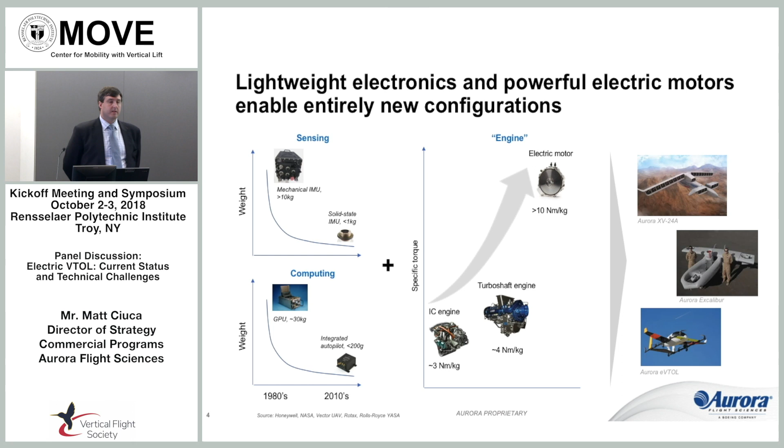Several technologies have come out over this time that were promises to simplify the operations, to bring more pilots into the fold, into the GA community, and to really improve access to on-demand air transportation. I remember quite a bit of talk in the 2005 to 2007 timeframe when the very light jets were coming out, and several years after Cirrus had entered the market, there was a lot of talk about on-demand aviation using those higher-end single-engine propeller aircraft and the very light jets, but we have not seen that happen.

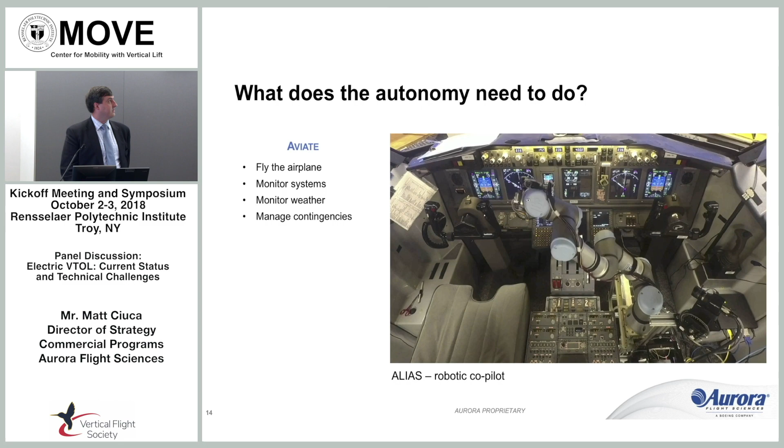So then I'll jump to the next section, which is navigate. This is an example of the perception equipment that's actually on the AACUS system - that was the first system we saw the Marine actually ordering a delivery with. What this does is come in and evaluate the area and determine where to land, where to safely land. And then today, a human operator will confirm that that's the appropriate place to land.

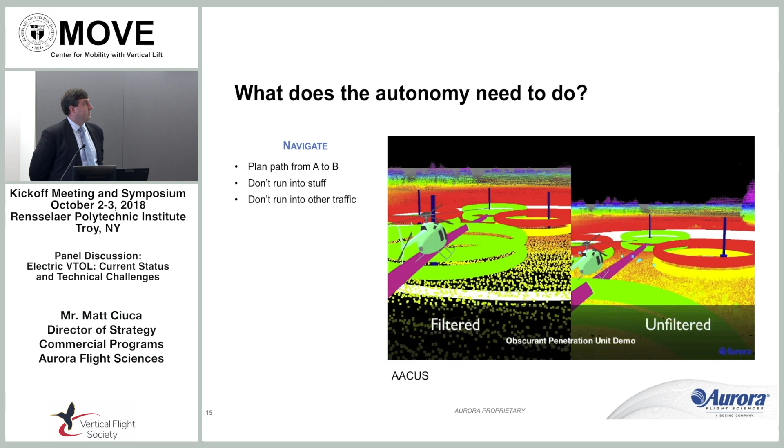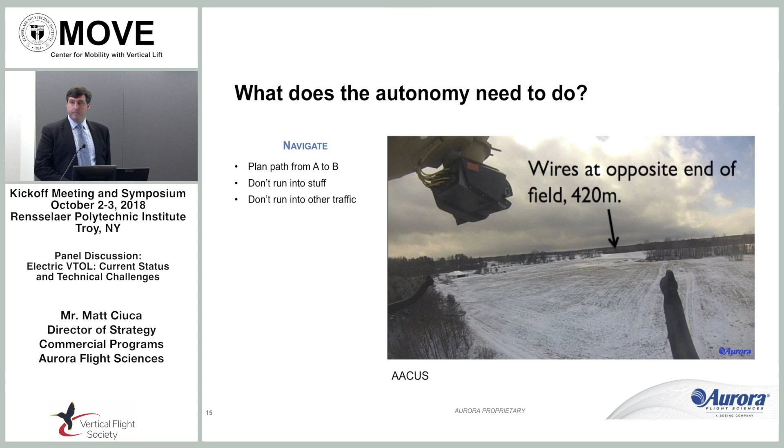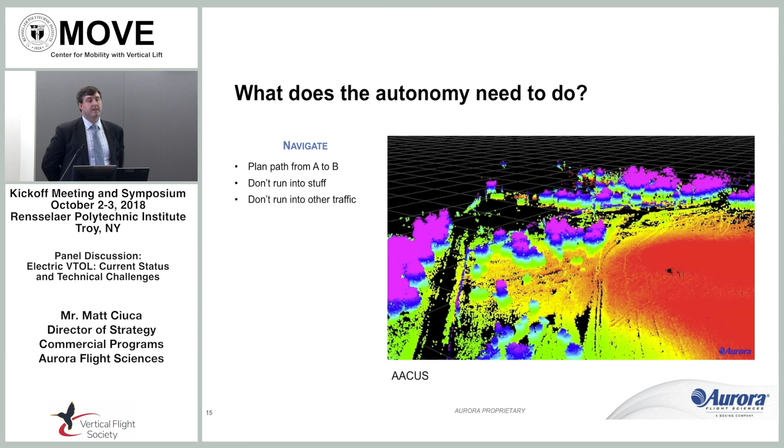So you can see that we're already looking at the sensors and the software required to do the navigating part. Now, I didn't bring a slide on the communications side of things. We basically, even when these are operating autonomously currently, we relay our communications. So we talk to ATC. ATC doesn't know that there's not a person sitting in that aircraft, the way that it's done.

And so that's really where I'm going to close out. But I appreciate you guys having us, and I look forward to the questions later.

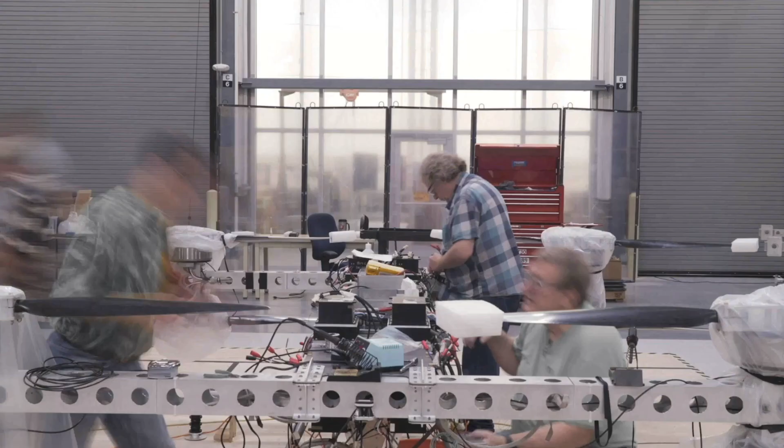So this is our latest vehicle. I'll talk more about that. And then here's some Aurora videos. So we're like this.

And just for fun, we're going to throw a hypersonic transport in there. Why not, right?

I guess first of all, I want to say that I want to hire a lot of RPI folks because you're already working on a lot of relevant stuff, and it'll be easier to get you going. So, of course, everyone here in the panel probably wants to hire you. So I want to make sure this is the coolest job out of all of them. But you all sound like you have really great jobs, so it's going to be really rough. All right, stop.

So the next slide is the key. Sorry, I'm in some weird mode. Hold on.

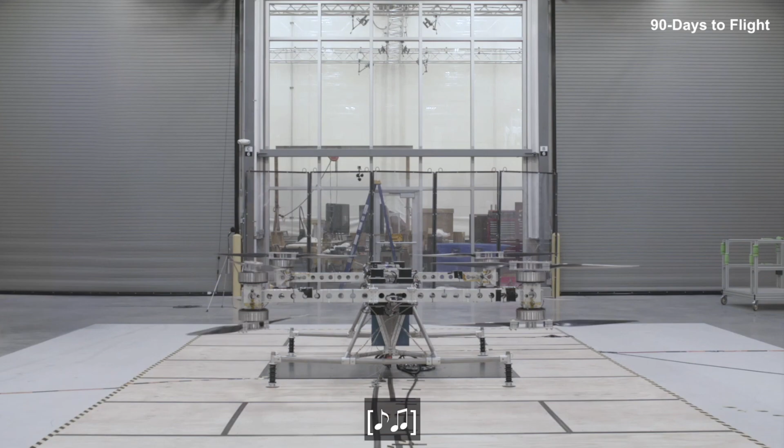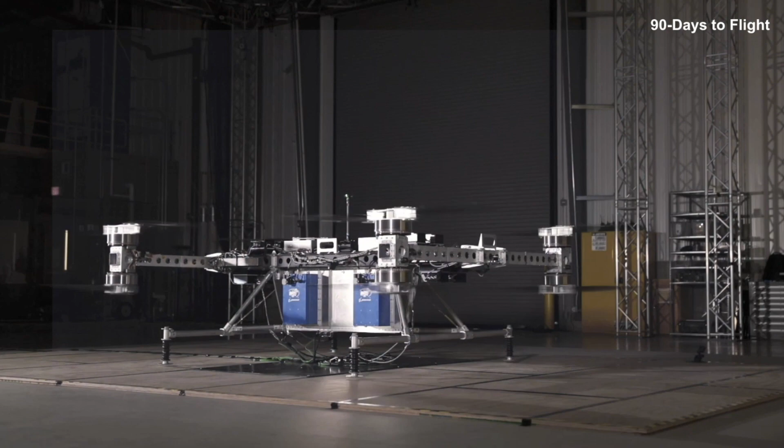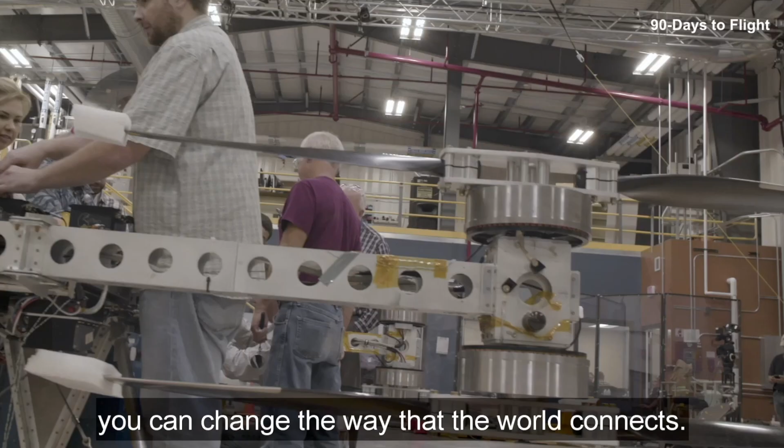Some of these times it's really funny when you have a camera on you. When I saw it take off, I was inspired by it. This team of Boeing engineers was able to do the impossible and deliver a prototype. In a matter of 3 months, we took a concept from a piece of paper all the way to a flying vehicle. So this is an octocopter, fully electric on some Boeing custom designed batteries. The goal is to grow into a large-scale cargo platform. If you extend the range and extend the payload a little bit, when you think about delivering 250 to 500 pounds over a 10 or 20 mile radius, you can change the way the world connects, you can change the way we deliver goods.

That's our CTO. Not the guy on the ground - that was me.

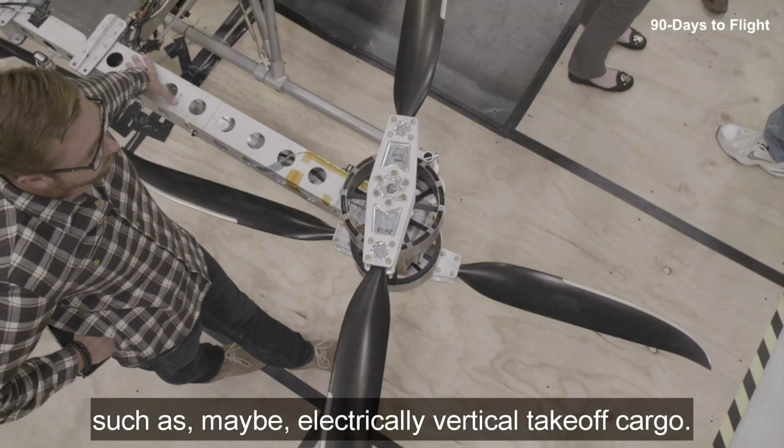We've really got a convergence of technologies right now in terms of hybrid electric propulsion, vertical takeoff, and autonomy, that is going to unlock air travel in areas we haven't seen it before. So it becomes a test bed for future businesses, such as an electrically vertical takeoff cargo vehicle. This is my dream job, trying to come up with something new that the industry doesn't have yet. The company really is trying to change the future of the world. They are driving and on the leading edge, pushing the envelope, but doing it in a smart way. Boeing is at the cutting edge of technology in aerospace. We have a chance here to really change air travel, and we'll look back on this day as a first step in that journey.

I have chills right now.

I'm going to give you some challenges I want you guys to work on around this space, but basically test, learn, and fly is what we're doing. We're learning a lot, and those are the things we're going to move into the next space. It's the speed we're working at, the integration of all these pieces into the larger system, and that's where I'm excited to work with you guys because there's a lot of technical challenges. This is the most exciting time to be in aerospace. I'm 100% sure of that.

One of the challenges I'm going to give you, just verbally, is transition to edgewise flight for rotorcraft especially. That's always been the challenge - transition to forward flight. And cyclic loading transients are going to be a big driver. Think about that, especially when you're talking about stiff in-plane rotors. We've done it for many years, but now we're talking a much different scale.

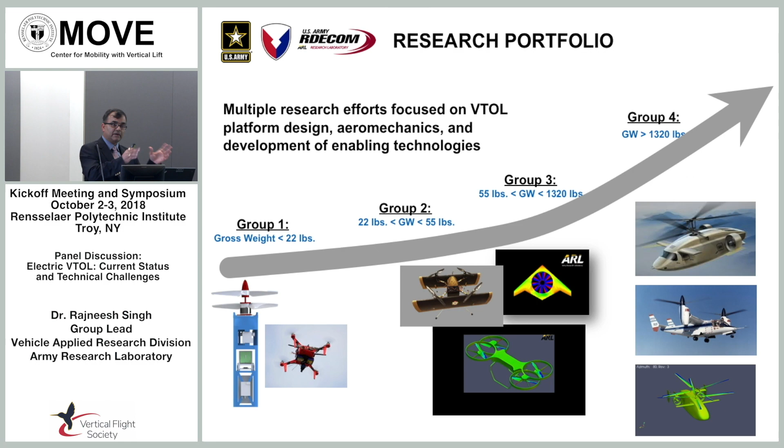At ARL, we are active across the scale, ranging from Group 1 to Group 4 - these are the DoD scales based on the weight of platforms. In the next 3 slides, I have examples from the lower end to the large end, and how elements in those areas are relevant to eVTOL scales.

Let me start on the lower end. The project here is about developing a design and manufacturing process that allows a warfighter to build a small quadcopter or small UAS on demand. Based on the mission requirement, we want to create a process where the mission requirement gets translated into a vehicle design, and then using additive manufacturing it could be assembled in a matter of hours.

One critical piece we need, in addition to advances in additive manufacturing, is having a tool that gives you the performance - if you're designing a certain vehicle to meet certain performance, we have to have good confidence in that. Because of scalability, much of the knowledge from large-scale tools used for large helicopters is not applicable in this space. So the solution is that we probably have to look into bringing higher fidelity into our design tools.

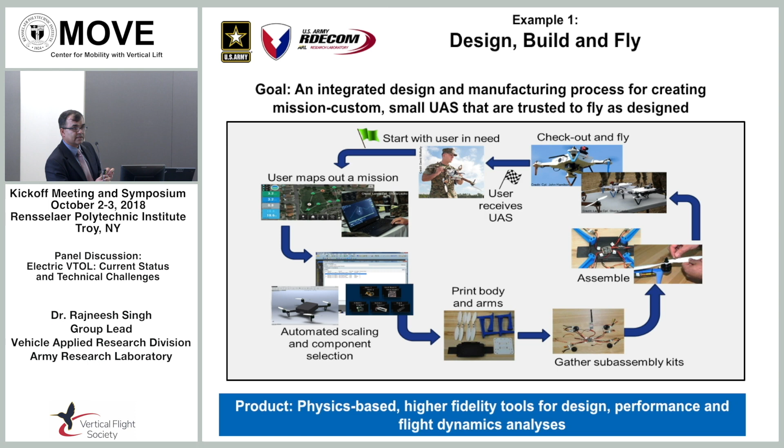As we are doing this, one of the things we are realizing is that models for electrical subsystems, motors or batteries, is one of the big gaps. That's one interesting challenge for the S&T community to work on.

Now on the other end is tilt rotor aeroelasticity. This is a project focused more on the large scale for future vertical lift - whirl flutter instability, rather. It's a well-known problem for tilt rotors, where the dynamics of the rotor couple with the dynamics of the wing, and that can lead to instabilities at high speed. The way you overcome this is by designing a thicker wing, which leads to a weight penalty and a performance penalty.

So now we have effort on all 3 sides. We are fabricating a test rig that would be available for internal test in the 2020s. This is also an area where we have collaboration going on with Scott's team. In fact, right now we have 3 of our colleagues sitting at Dallas who are discussing exactly the same project.

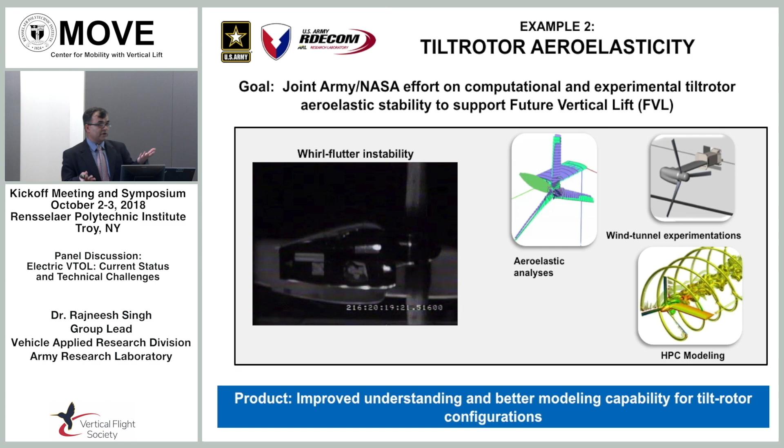Tilt rotor is probably going to be a fairly promising candidate from the eVTOL applications point of view. So some of the things we are going to learn here, which will go into developing tools or just the basic knowledge itself, is going to be relevant for eVTOL applications.

Now, third example, it's focused on Group 2, Group 3 scale, which is the prime eVTOL scale. The idea here is to look at rotor concepts for this class of vehicle. Once again, because of scalability, there have been some concepts which have been looked at for full-scale larger platforms but have not been found feasible. So there are some concepts which can make sense for this class.

And the stacked co-rotating coaxial rotor is one of those. On this topic, we do have collaboration with Uber, where they are paying for the experimentation part and we are doing the modeling and simulation part. For experimentation, they have a separate arrangement with the University of Texas Austin.

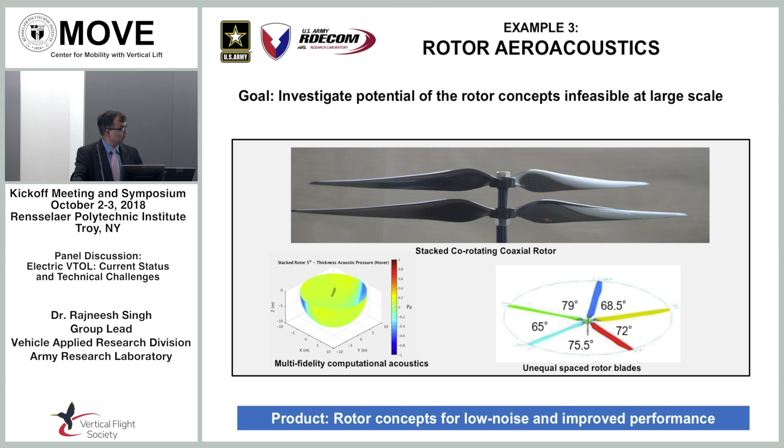So again, the goal here is not just to look at new concepts, but to develop the whole capability that we could use to investigate and develop new kinds of rotor technologies. Another one that can be looked at is unequal spaced rotor blades. This is technology that probably won't work at larger scale because of dynamics issues, but it can at least be explored more strongly at this scale. So this was just a small subsample of what we are doing. In addition, we have efforts on flight dynamics, rotor interactions, and so on.

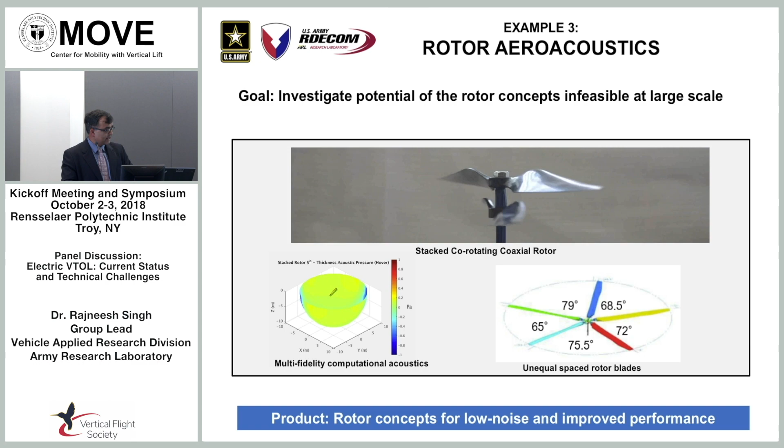And I think that's what leads to this initiative we are thinking of starting. The idea is to establish a common research configuration that we could use as a reference model, a reference configuration, to converge and connect different enabling technologies. This is what we've been working on with the University of Maryland - a quad biplane that would be our benchmark platform, with focus on making advances along three basic component areas.

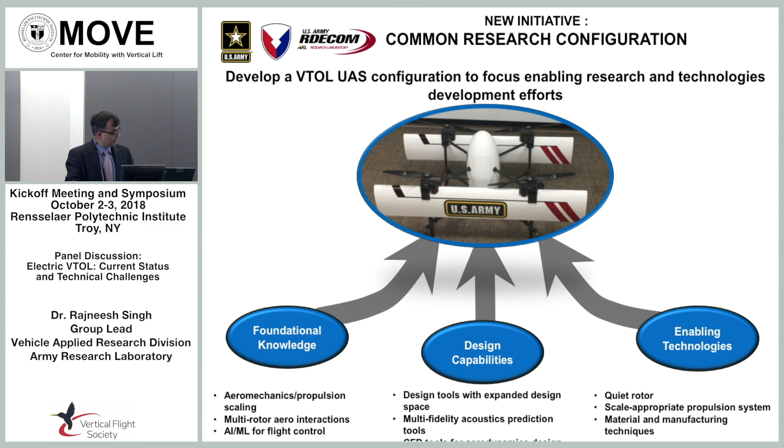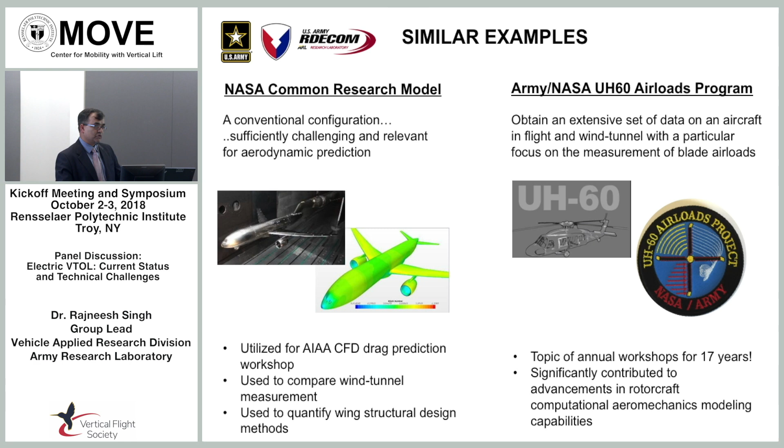Now, the idea of a reference vehicle is fairly common. NASA used a Common Research Model which is still active and has led to big contributions to the state of the art. UH-60 is a good example for our community, which was the subject of annual workshops for 17 years. Our goal is to pick some of those ideas from these similar programs and build or expand our common research configuration program to make further advances.

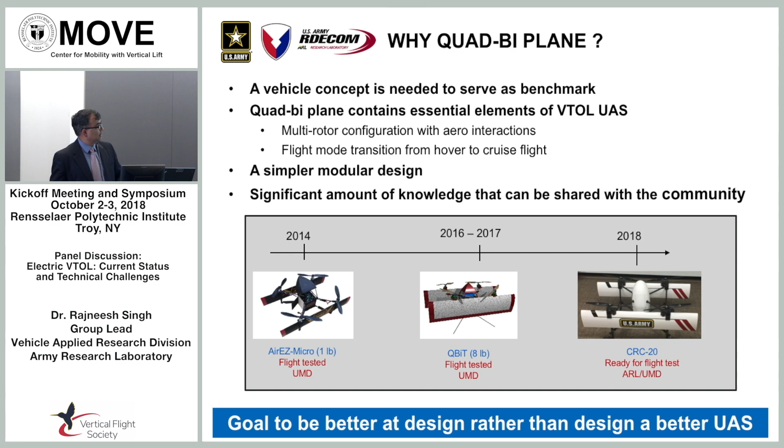Now finally, one question I get asked is why quad biplane? Here's a response to that. Basically, we do need a benchmark concept. The quad biplane is a nice eVTOL concept that has essential elements of VTOL, a simpler design, which is really nice to have for research needs. There's also a good amount of history, especially at Maryland, and for the last 3-4 years with us. We've looked at a couple of scales, and our goal is to keep going up the scale and develop the knowledge. And with that, I'll conclude.

And again, I just want to end with another opinion, another fact. My opinion is that eVTOL is a disruptive technology for the Army. And the fact is that ARL is looking forward to collaboration with any one of you here. If you are working on Army challenges, we can go out of our way to work with you. That's all.

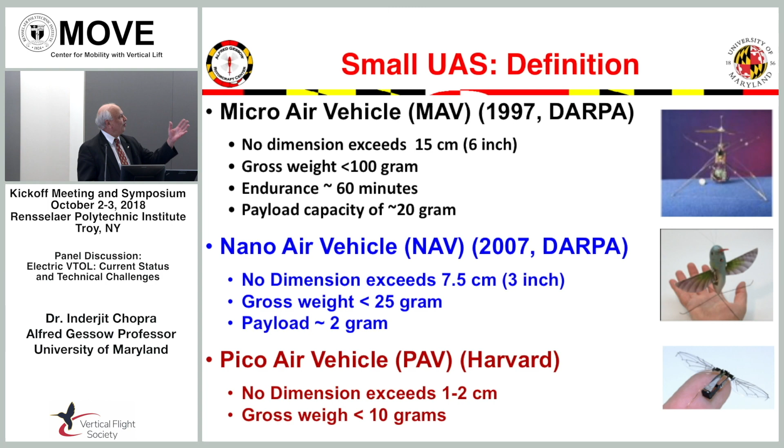Also under this category, you can mention micro air vehicles, as people call them. These are about 100 grams or less. Nano air vehicles are less than 25 grams. Pico air vehicles are less than 10 grams. These are tiny, more like sensors.

Then, I think in the last 3 years, this new thing came up: the delivery drone. Just to get a feel, if you take a payload of 5 pounds, which is more than 2 kilograms, it covers 86% of the Amazon delivery packages, within a radius of about 10 miles.

Google and Amazon are working separately to develop these vehicles. Google is looking at a tail sitter, which has 4 rotors, and Amazon started with an octocopter, then moved to many other derivatives. Besides these 2 companies, there are many others working in this area, for example Domino's, looking at pizza delivery. I think it's fascinating to see so many companies working in this area.

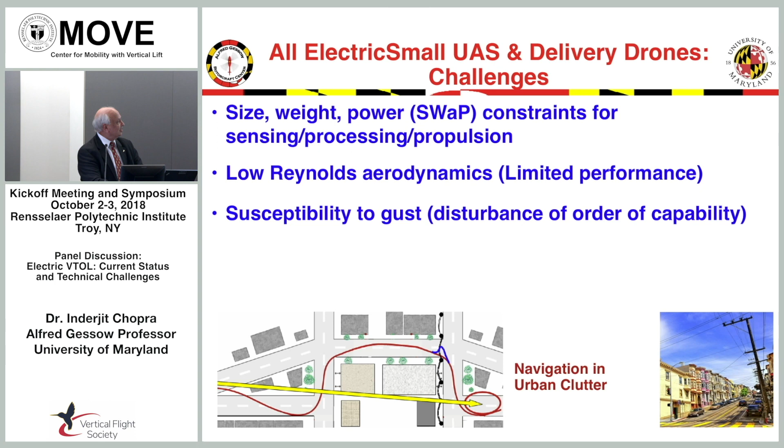What are the major challenges? Of course, size—small size, weight, and power, what we call SWAP—that's a big constraint. Lower Reynolds number aerodynamics means the performance is going to be limited. And gust is a big issue, especially near the ground, because the disturbance is the same order as the capability of the vehicle.

So this is what I'm going to talk about: small scale sustained power generation. And of course, these vehicles are going to operate in an obstacle-rich environment.

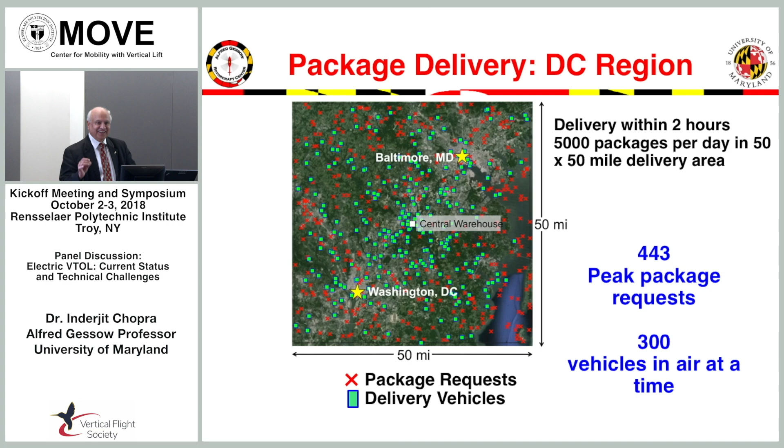I think 3 years ago, AHS had this student design competition to create a delivery drone. We covered the area of Washington, D.C. and suburbs, taking a radius of 50 miles by 50 miles. A day, almost like 5,000 packages are delivered. At peak time, it will be almost over 400 packages—443—which means there will be 300 vehicles being used in a day, at the same time.

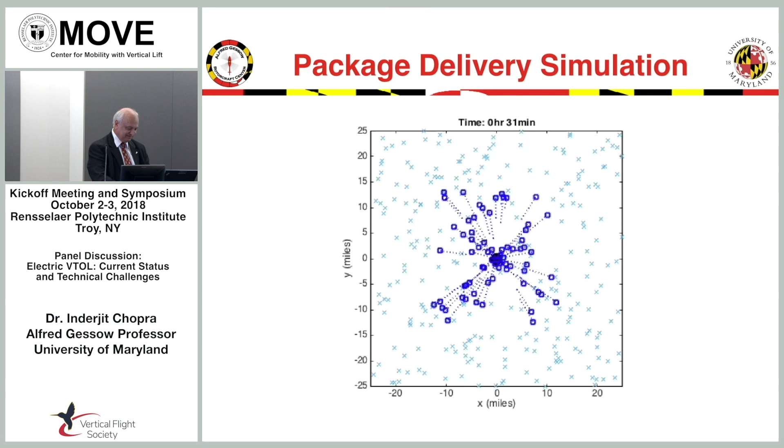So here is the picture of what it's going to be like: the central warehouse, of course the customer, the delivery drone, and the communication between them. You can see how these things go—this is going to be the market, all autonomous. From the warehouse right in the middle, you can see how these vehicles operate. You call the company and everything is autonomous.

I think DARPA gave this challenge of 100 grams, 60 minutes. Not many vehicles have reached that after almost 15 years, because there are a lot of challenges.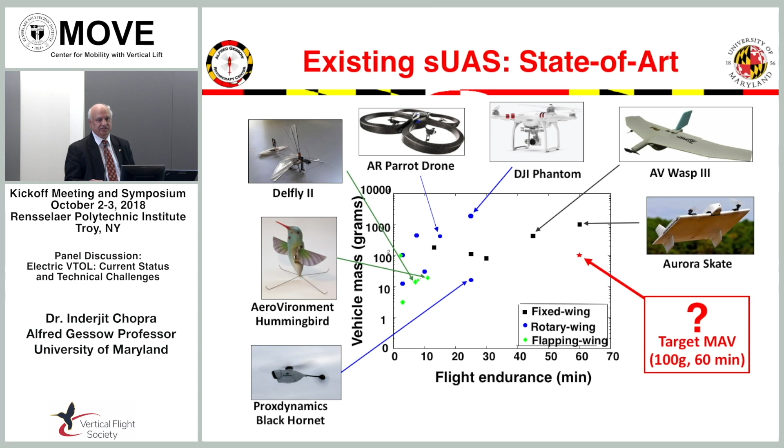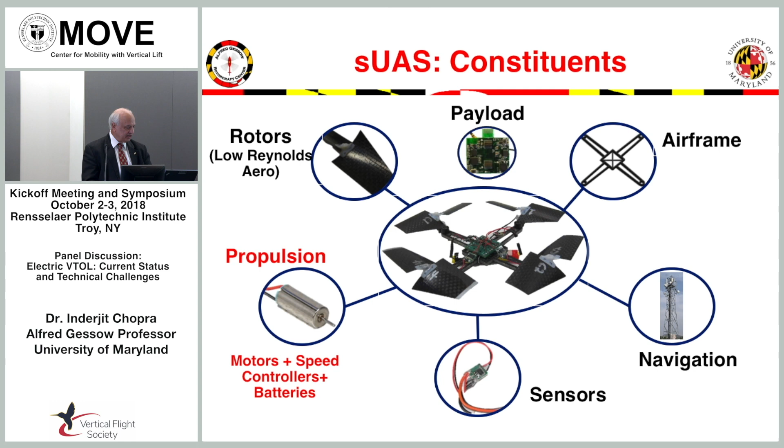Fixed wing can do it, but not rotary wing. Taking a rotary wing, you see the constituents—you need a rotor, a payload, of course an airframe, navigation, sensors, and the red one, which I'm going to talk about: propulsion. This is more like electric motors, battery, and maybe other things.

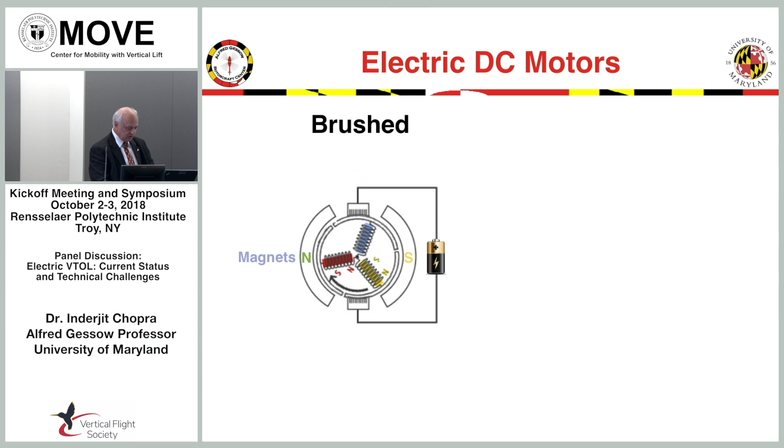So coming back to this, you need DC motors for small vehicles. The brushed motor—as you can see, these are very simple. The magnets are stationary, the coils are rotating, and because of brush friction, they don't last long. Very good for when you have a very small weight, say less than 100 grams.

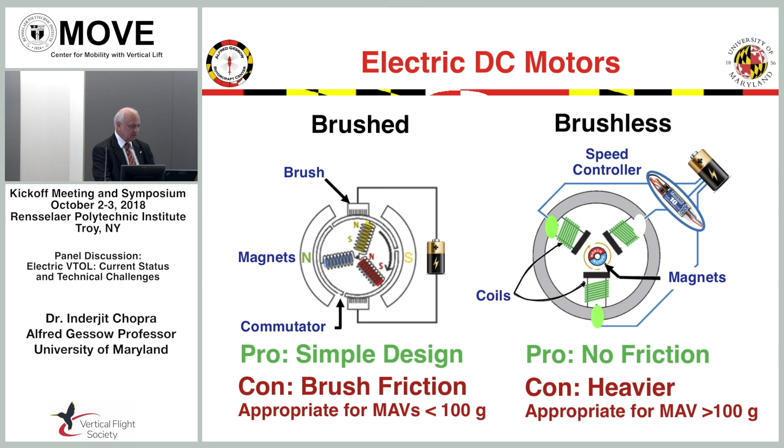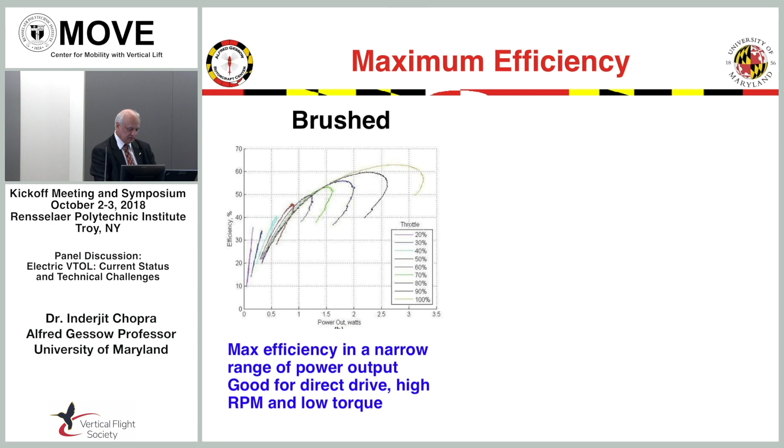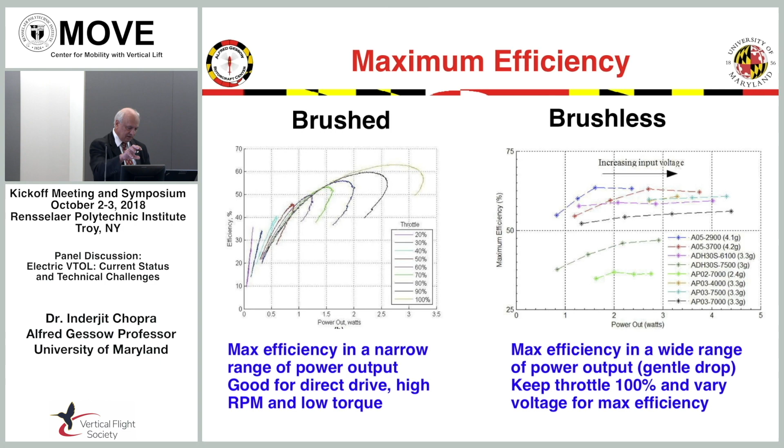More than 100 grams, then you'd go to brushless motors, which are more popular—no friction. But the biggest issue is that electronic control is very complicated, so it's heavier, good for more than 100 grams. The problem with the brush motor is the maximum efficiency for a very small motor—if you look at power versus efficiency, it's in a very narrow range. Whereas the brushless motor is much better that way, but they are heavy and more complex, because you need to provide a phased voltage.

As you start reducing the weight, the efficiency falls rapidly. For some of these small motors, single digit efficiency is a big deal. However, when you go to very large motors, you can get very efficient, all the way to 95%. So you have to be very careful.

A whole lot of questions people ask about motors. There's not much knowledge base at the bottom side because there wasn't much market. Now people start looking at it.

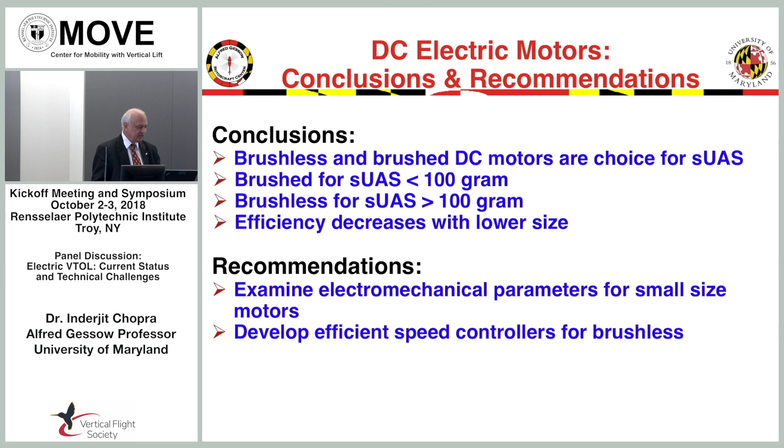Coming back to the motor conclusion, brushless motor is probably the way to go for more than 100 grams, and efficiency decreases with lower size. That's the way to go. Recommendation is to examine electromechanical parameters for these small sizes, which haven't been explored very well, and come back with a more efficient speed controller for brushless motors.

Coming back to the battery, a lot of things people talk about with batteries, and enormous things are going on. This is probably the hottest topic right now in academic circles. You go to any institution, you can find 8, 10, 15 people working on this.

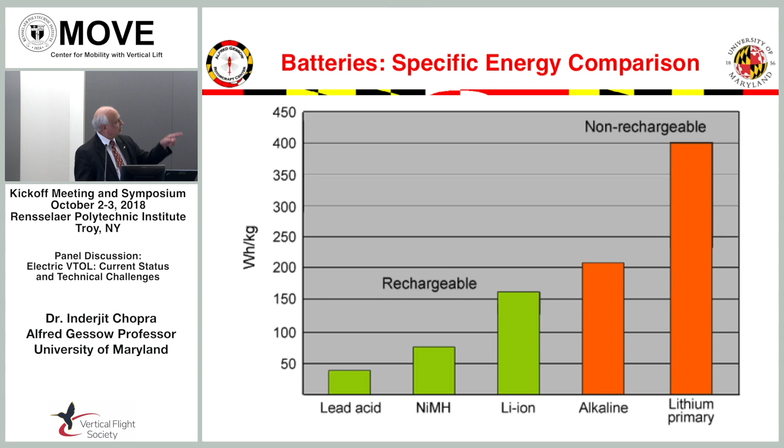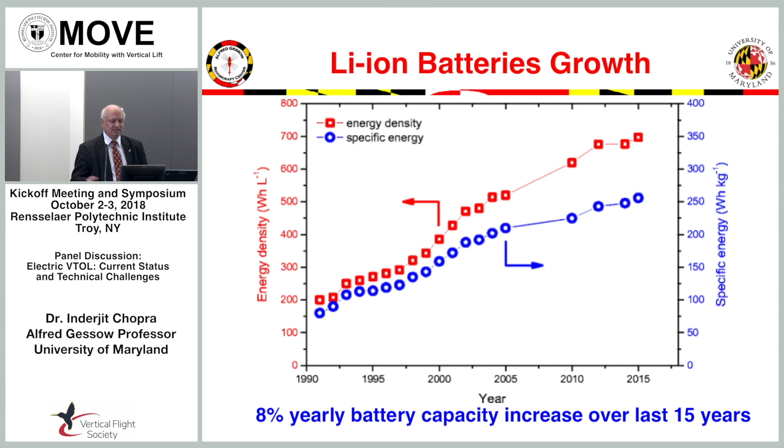In the last 15 years, it's like Moore's law, there's been an 8% yearly increase in battery capacity. So batteries are not sitting idle. People who think nothing is happening haven't seen what's coming, because when I look at academic work, they're talking about even twice or three times this improvement. Things are going to change.

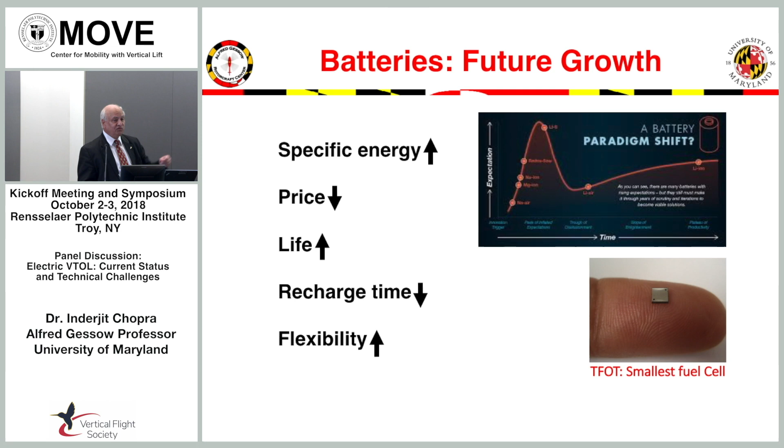What's happening in batteries? Specific energy is going up, price is going down, and the life of the battery is going up. Recharge time is going down, that's because of electric vehicle people. All these other factors are because of cell technology, and flexibility too, the batteries are becoming more flexible.

Let's talk about IC engines now, internal combustion engines. When you look at the specific energy of hydrocarbon fuel, it's about 100 times that of the electrochemical material used in batteries. So very little fuel has so much energy in it. So why aren't we using it?

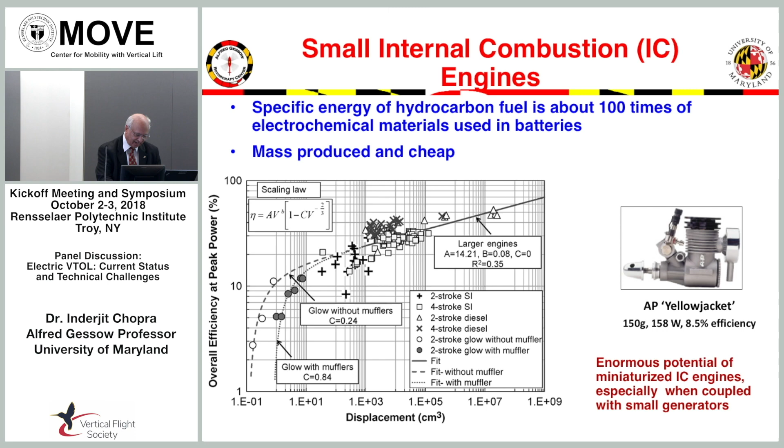The problem is right here at the bottom. When you start reducing the weight, the efficiency falls very rapidly, because of increased losses from heat transfer, since when you have a small thing, where do you send the heat? Fluid friction, leakage, and all those things cause efficiency to rapidly fall.

We need to come up with solutions, this is where nanotechnology has to come in: materials with higher thermal isolation, increased combustion efficiency, and somehow control the acoustics. Acoustics are terrible, these small motors make enormous noise. Once we overcome these things, there's tons of energy available. All you need is basically a proper alternator.

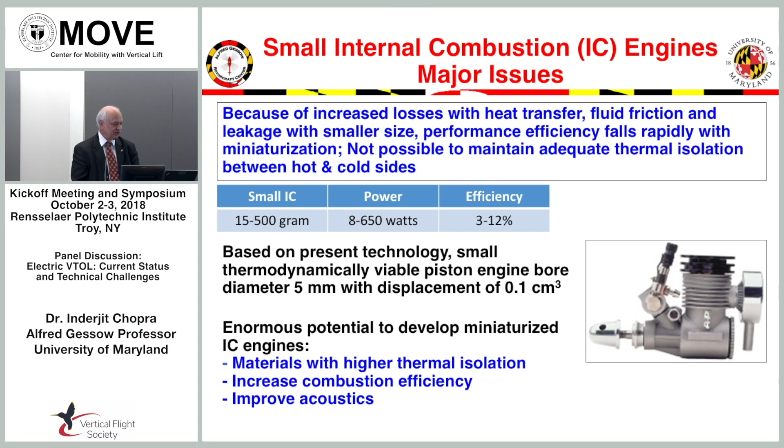So coming back to small unmanned aircraft, if you are thinking non-hovering, that's fixed wing. For rotary wing, there are a whole lot of options: single, coaxial, shrouded, quad, unconventional rotor systems. If you want high forward speed and long range, you need to go to compound configurations: tilt rotor, tilt wing, tail sitter. Flapping is also possible, but these are too complex to build right now.

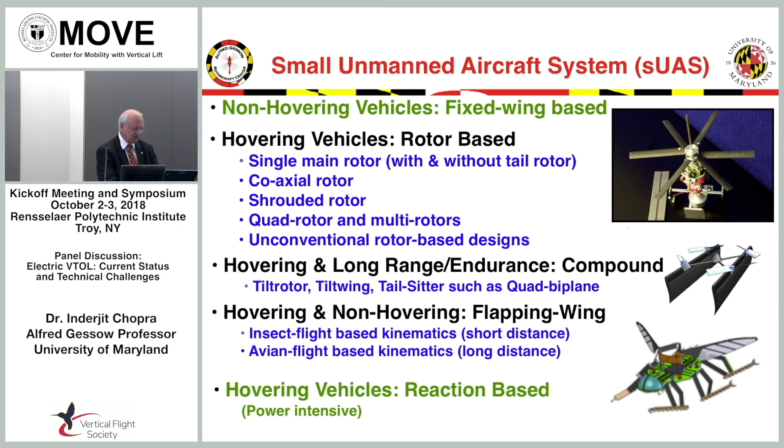If you go insect-based, you can hover. If you go avian-based, you can go long distance and high speed, but you cannot hover. Reaction-based is probably not a good idea because it's very power intensive.

So coming back to compound configurations, as Rajneesh was talking about, you need both hover efficiency and cruise efficiency. Then you go to the compound, tail sitter, tilt rotor, tilt wing, all these things are possible. The biggest challenge in these is the transition flight.

Transitioning from helicopter to fixed wing and the reverse. Even looking at blade twist, you have to make a proper compromise. RPM absolutely needs to change between both modes. So here is, of course, the quad biplane.

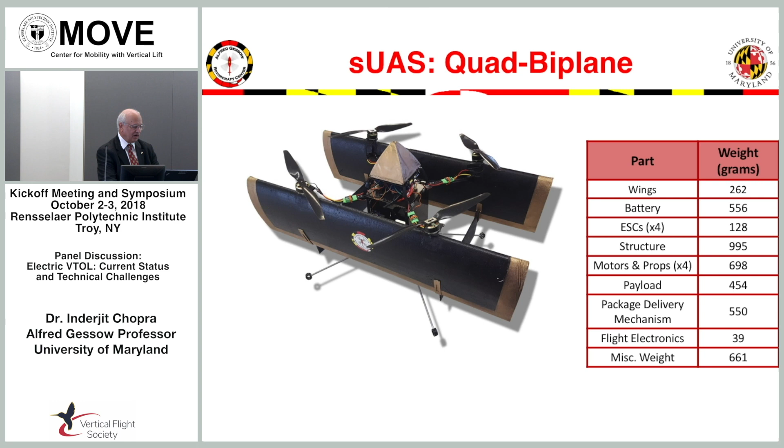Here, helicopter mode, airplane mode. This is about a 5-pound vehicle.

Coming back to key challenges, of course you need efficient aeromechanics, which means a high figure of merit of power loading, and also high cruise L over D. You need an electric motor with high operating efficiency over a wide range of operating conditions, and variable RPM capability. Also think in terms of the issues related to coupling these motors with the rotor, needing stability in both, and minimizing or eliminating the rectifier or inverter because that's additional weight and creates a low acoustic signature.

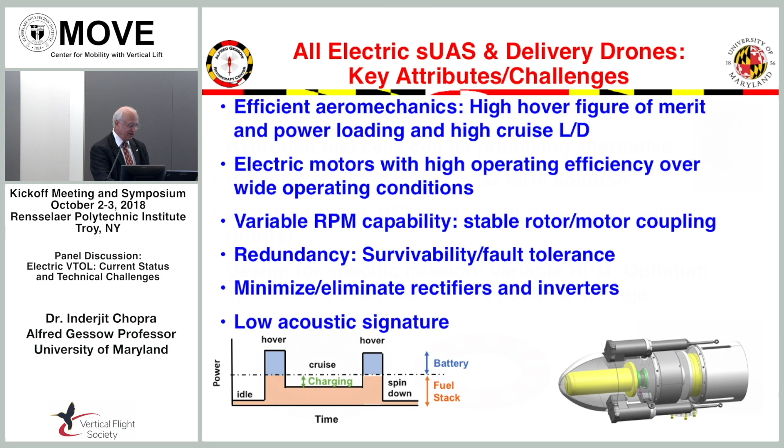The fuel stack technology is also moving very rapidly because of the electric companies and automobiles. There may be a possibility you may not need a battery at all. Battery may be needed only as an augment in hover condition, takeoff and landing. Batteries are of course too heavy for long range at this time. Hydrogen fuel cell can be a promising alternative.

Hybrid internal combustion electric can also be a near-term solution. The future is, people haven't paid as much attention to the motor side, high torque, low RPM motor - that's the future. If we can come up with a good motor with high torque, it means we don't need a transmission, an enormous reduction of weight. Design-wise, most of these vehicles which have been built are all built basically ad hoc. If you start building a vehicle for a specific mission, then you can optimize it. There is a lot more that needs to be done.

So where were we, say, 10 years ago? Mostly it was fixed wing at that time. Today, of course, it's all quad rotor. The future is going to be more hybrid. 15 or 10 years ago, people didn't think of payload, but now it is a modest payload. But again, I think the future is more mission-based. Propulsion used to be all battery, but next is going to be a combination - battery, fuel cell, and so on and so forth.